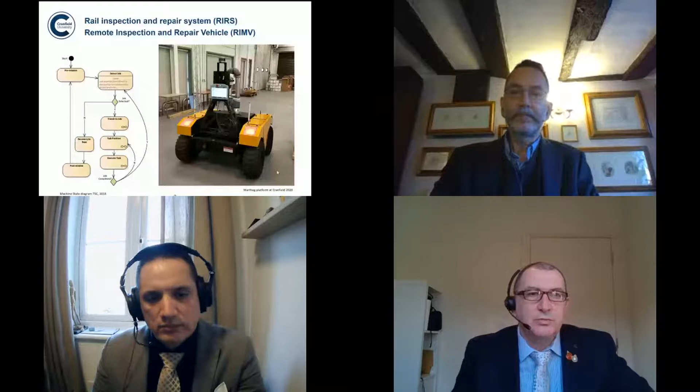Can you hear me? Yes. Good afternoon, everybody. So I'm Rob Anderson. I'm a principal engineer for Network Rail, and I lead the team that looks after specialist remote condition monitoring and the development of autonomous intelligent systems.

So first of all, why do we want to move towards the use of robotics in railway maintenance? Prior to the current restrictions on COVID from the pandemic, we had year-on-year demands from both freight and passenger services to increase the amount of traffic on the network. And because we have a limited network with no ability to expand, the only way to accommodate them is to cut down the time we have during the night for inspection and maintenance, thus allowing more time for the traffic to operate.

This is requiring us to revisit the way in which we undertake inspection and maintenance. For several years now, we've been moving towards a greater use of remote condition monitoring. This has been accelerated over the past couple of years and will continue during Control Period 6 through the Intelligent Infrastructure Programme. We are now moving towards the use of, or the aim to use, autonomous robotic vehicles to carry out this inspection and maintenance.

We've been doing this generally through our work with the Shift2Rail programme and our European partners, primarily through In2Smart and In2Smart2 projects, which we've been working on alongside Cranfield University to develop the autonomous command and control architecture.

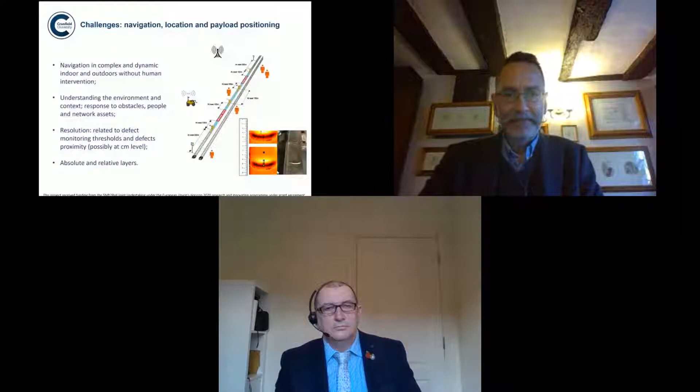Communications is a problem because in some places communication is great, in other cases it's very poor indeed. Then we need to deal with some of the challenges of the environment, the context that Rob was just describing.

Then there's real obstacles, some of which are intended to be there, like overhead electrification masts, and some which are perhaps less intentional but equal obstructions, and that might just be materials which have been deposited near the railway for later use—all of which have a genuine reason to be there, but make a challenge to autonomous vehicles.

Then we need to think about all the different information which applies here, and actually getting the vehicle to do its job when it gets there, which is about observation and measurement and action.

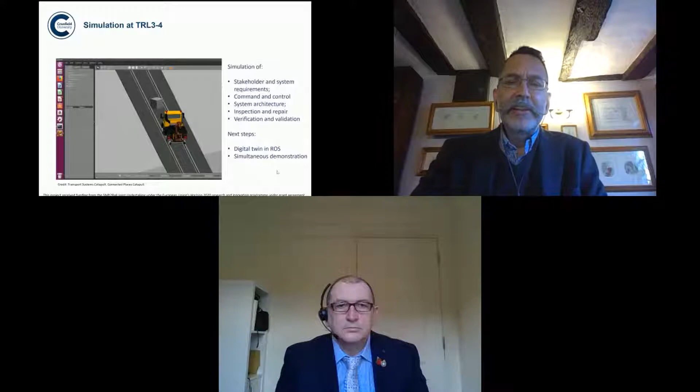We're particularly interested in making the simulation work with the real vehicle. Here you see an image from some of the earlier work done by the Transport Systems Catapult with a different type of vehicle. And really the vehicle itself is something which we are agnostic about.

The illustrated example in the screenshot here is a Unimog, Mercedes Unimog vehicle, which clearly is different from the Warthog vehicle. However, it's got a lot of the same stakeholder requirements, command and control issues, systems architecture, and the requirements for inspection, repair, and importantly, verification and validation of that system.

So next steps in simulation are to produce a digital twin type architecture in ROS. Those who were on the last session saw some implementations of that in other people's research, and a simultaneous approach where the vehicle can be observed and programmed and be seen to be doing what is in the program in real life as well.

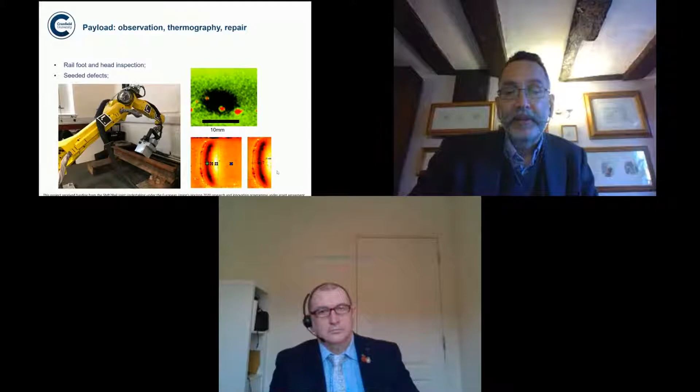Then we're interested in a variety of different payloads, that is involving inspection and repair. In the first instance, we'll use some simple visible light cameras. The Warthog vehicle already carries two as a matter of course, and there's additional sensing like LiDAR, for example, on board.

But from an experimental point of view, we've been using thermography in the infrared to detect rail foot defects, and we have also just started a piece of work to look at rail head defects and set up the Warthog with some ultrasonics measurement in order to make those observations.

In the image here you can see some of the thermography work that Isidro's led, and that has positioned an active thermal infrared camera to detect faults on the rail foot. The rail head has plenty of technologies which are quite mature for detecting faults out on the railway, but it remains a challenge to be able to see, for example, corrosion pitting on the rail foot.

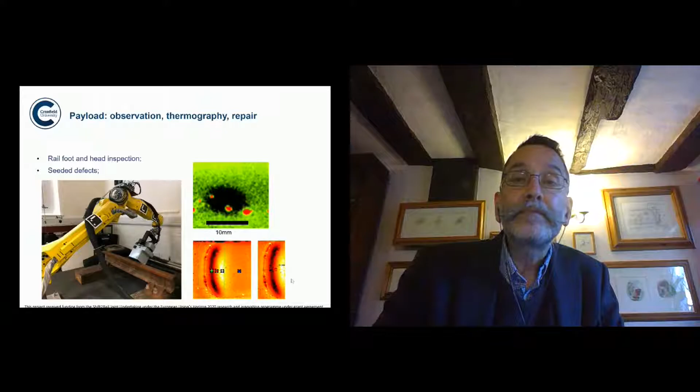So I mentioned that we're also doing a number of projects in track work, and within In2Track we did a project a couple of years ago in In2Track 1, and all of these either have started or are about to start in In2Track 2. So we're going to tell you a little bit about our work in switches and crossings, and we've also just started a piece of work on track geometry repair.

Track geometry is often dealt with wholesale on a large scale by large track tamping machines and lining machines, but there remains a particular interest in reducing the cost and improving the effectiveness of spot repairs of a few meters of geometry.

Then we're also looking at some rail defect monitoring with ultrasonics led by Isidro, and that leads into a parallel piece of work with ultrasonic testing on the Warthog vehicle, which has just started as well.

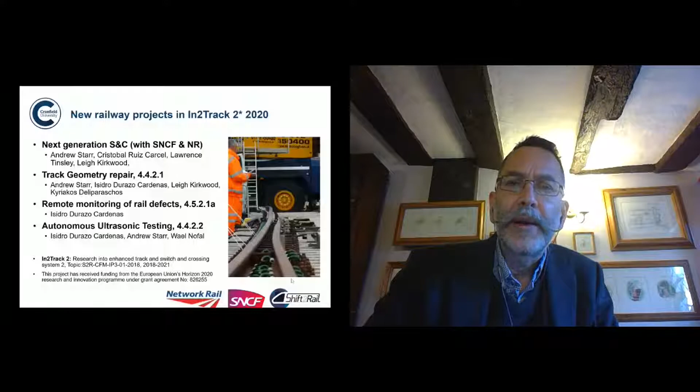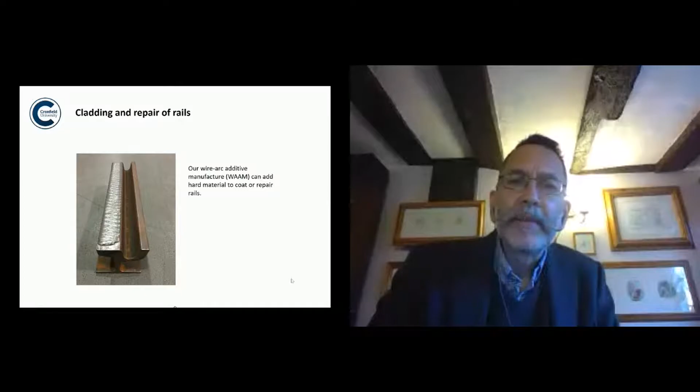Thank you, Andrew, and thank you, Rob, for the interesting introductory presentation. As Andrew mentioned, we move on to the presentations by the current researchers on current projects, and they will give you a flavor of what's going on at the moment at Cranfield, and an overview of the research and what would be potential challenges and opportunities for these different areas of research.

So the first, I'll try and share my screen with the order of presentations now. See if that works. Okay, I'm going to go to my... It looks like I'm not able to share my screen. Isidro, you may want to share the application. So if you go on to the share screen mode, you should have tabs. Select what you want and then click share. Yeah, but it's not there, Pawan. So anyway, let's move on. The order I will introduce the presenters anyway after they finish.

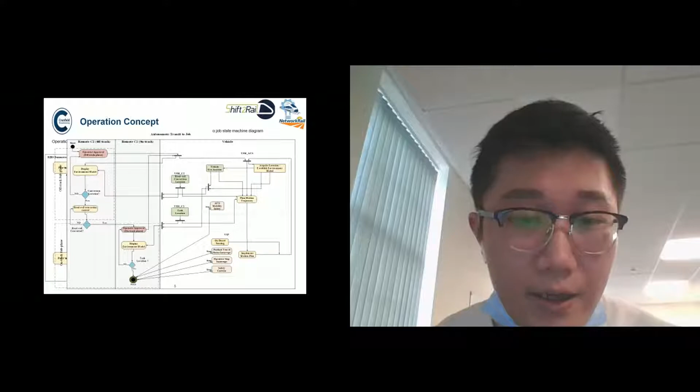For the project management, our team also established a TRL evaluation tool to help the manager and the collaborators have a full understanding of the progress and the completion of the project. This project is inherited from the previous one, so for this part, we will start from TRL 5 to TRL 7.

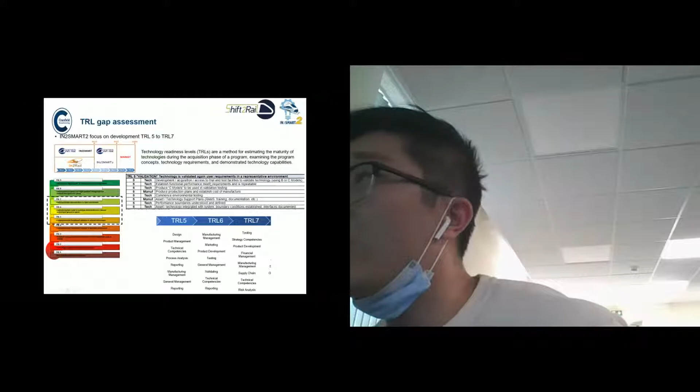This tool can help the management to examine the standard of the TRL and the progress we have in the database, by examining each standard criterion of the TRL with the progress or documents in the database. The manager will have a completion percentage of the whole project, and then

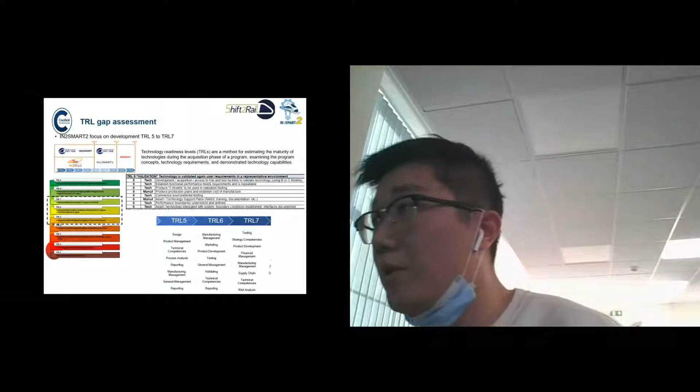if this TRL hasn't been achieved, the tool will also give out what kind of skills of the workers or the developers are needed, to help the manager get help from the people who have these kinds of skills.

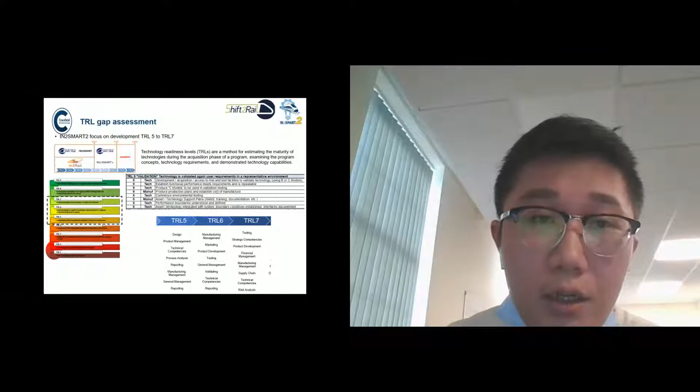To achieve the command and control of the RIRS demonstrator, we decompose the demands of the stakeholders and the recombination into several sub-work packages, which will help us to build and model a system architecture. For the command and control, we're gonna finish the human machine interface, work acquisition control, the geolocation and geomapping part, data management, the external system ad hoc interface, and integration layer.

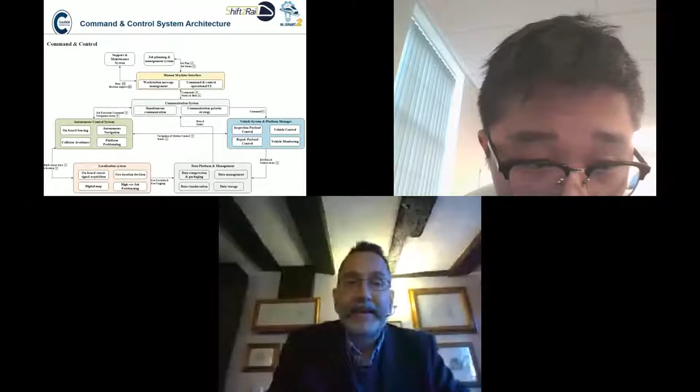How come you're muted? We've lost your sound, Hao Chan. Isidro, would it be better to move on to our next speaker? Because the... Yes, I think that will be a good choice. So the next presenter is Masoumeh Rahimi, and she will talk about her work on location. Good plan, thank you. To everyone.

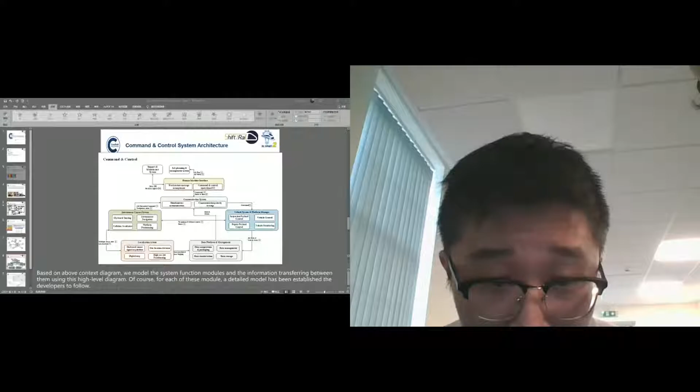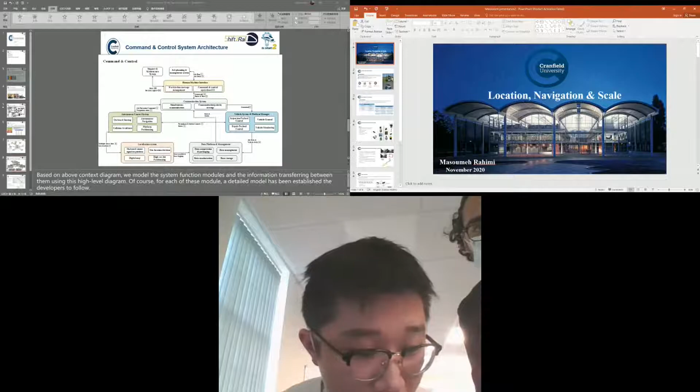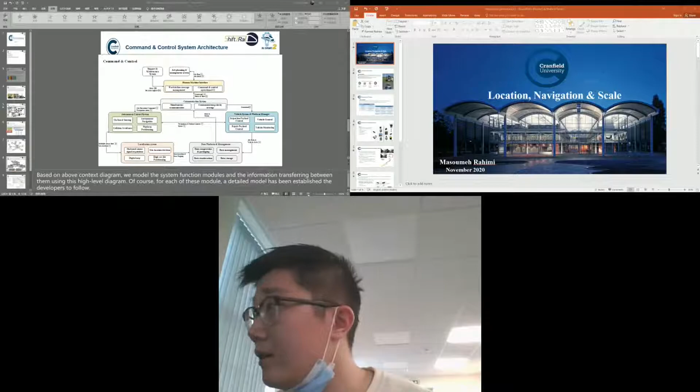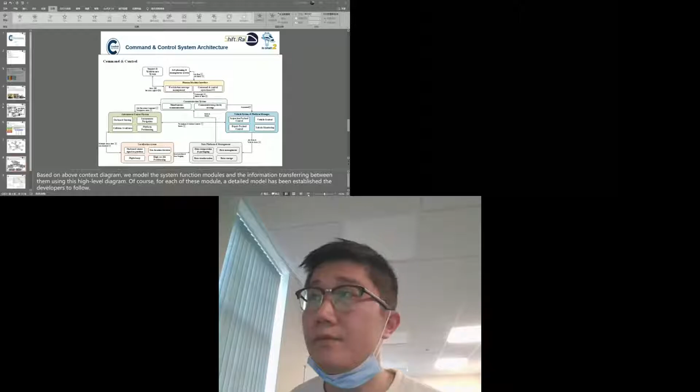Hello. Okay. How can we hear you now? I should stop sharing. We're just trying to get Masumi going. Hello. Can you hear me? We hear you. Do you hear me? Yes, it's clear. Okay. Sorry, I don't know what the problem is. You went on silent. You became muted. So if you'd like to wrap up, then we can move on to location navigation. Okay. May I start? Hao Chan can finish, and then Masumi will go on. Okay, I will finish mine. I have only one slide left. Yes. Thank you. Can you see my screen? Masumi, can you just wait till Hao Chan finishes? Sorry for the software problems.

Thank you very much. My part is finished. Thank you. Masumi, you can go on. Yes.

From where I can... I click on share screen, but my PowerPoint is not coming to application window. Can you hear me? We can hear you, yes. But you know, I click on share screen, I cannot see the PowerPoint in order to share with my audience. The first time I saw it, but now I cannot find it. Okay, is there anyone on the line that can help? Yeah, yesterday someone faced the same problem during the presentation, and then he refreshed the page with Control R, then it worked. Maybe Control R. No. Just see, I can share this one. I cannot see my PowerPoint. The only item that can on my laptop is this.

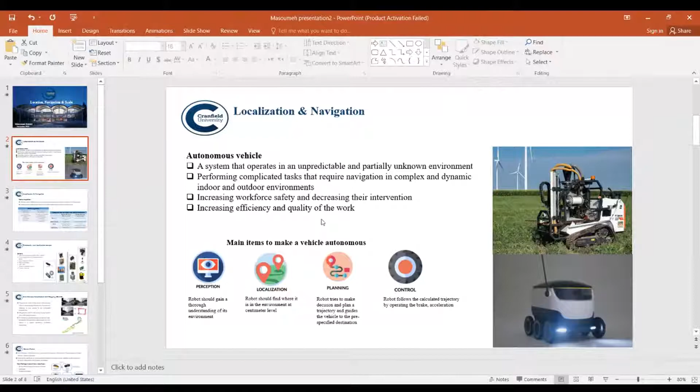Okay, so sorry. My presentation is about location, navigation, and scale. First of all, about autonomous vehicles. An autonomous vehicle is an agent which is capable of navigating intelligently anywhere, in various static and dynamic environments, and the applications of mobile robots are growing day by day in industry, agriculture, transportation, railway, as they are performing complicated tasks that require navigation in complex and dynamic indoor and outdoor environments. They have also offered a vast variety of positive points to their users, such as increasing workforce safety as well as decreasing their intervention, and also increasing efficiency and quality of the work.

But for having an autonomous vehicle, there are four main items that should be met: perception, localization, planning, and control. In perception, the vehicle utilizes a group of onboard sensors to detect, understand, and interpret the surrounding environment, including static and dynamic obstacles. In localization, the robot should find where it is in the environment. In planning, the vehicle uses the knowledge of the robot's position and obstacles around it to make a decision and plan a trajectory. And lastly, in control, based on the selected path, it extracts the necessary values regarding acceleration and brake for the vehicle.

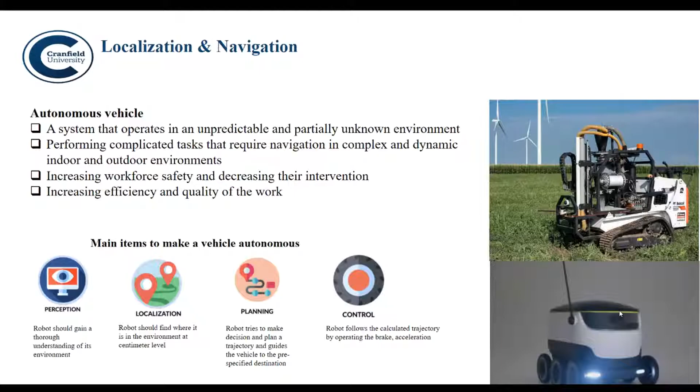Next, we have two main types of position acquisition, absolute and relative position measurement. The first refers to localization techniques that provide a direct measurement of a global position. The second refers to the process of determining position relative to a starting point. For these two methods, different kinds of sensors have been proposed. We have GPS, laser range finders, cameras, and beacons for absolute measurement, and inertial navigation systems and dead reckoning devices for relative position measurement. These two types of measurement have some differences in terms of reference requirements and errors.

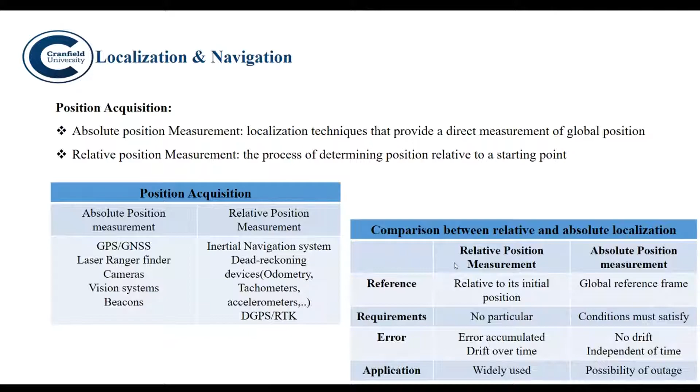Nowadays, three major types of sensors are applied to the SLAM technique: acoustic sensors, laser rangefinders, and visual sensors. But as I mentioned earlier, these sensors have their own positive and negative points. So in order to overcome the limitations of individual sensors and improve the efficiency of the overall autonomous vehicle system, sensor fusion methods have been proposed. The main challenge in sensor fusion is that these sensors provide different temporal and spatial resolutions, different data formats, and geometric alignment. Here I have also mentioned the impact of sensor fusion. For instance, for navigation, if you use GPS and INS without fusion, we have GPS outage in denied areas and drift in INS readings. But with fusion, we have continuous navigation and correction of INS readings.

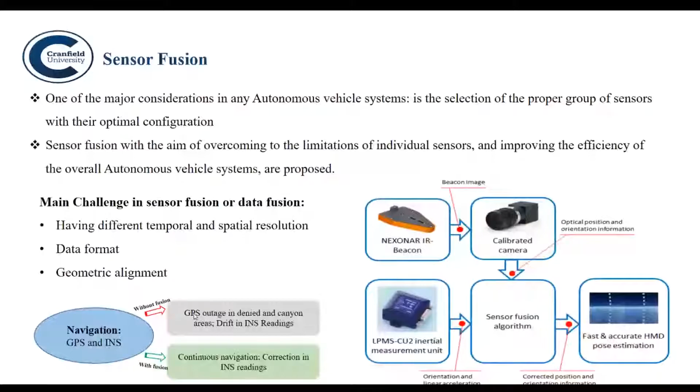First of all, we want navigation which we want to perform in complex and dynamic indoor and outdoor environments without human intervention. The second challenge is understanding the environment and context. We want this autonomous vehicle to be able to respond to obstacles, people, and network assets.

And the other challenge is resolution, that we expect to have a robot that can detect and monitor thresholds and defect proximity at least in centimeter levels. So this is the final presentation.

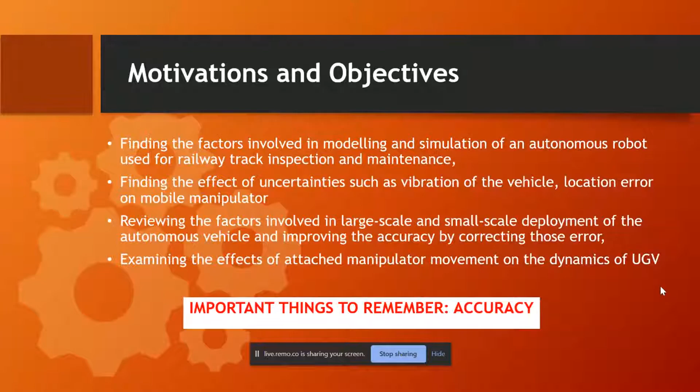So as we are going, we need a robot which can travel, and also we need an arm. So we chose the Warthog UGV from Clearpath Robotics and the UR10e arm from Universal Robots. So we get a mobile manipulator which can travel a distance and can perform some task or can carry a camera for the inspection work.

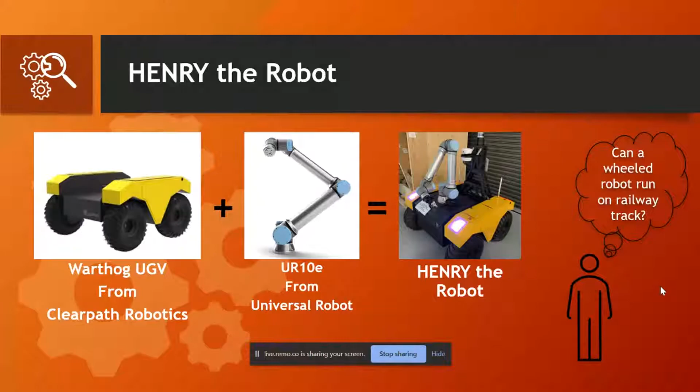So the question arises whether it can travel on the railway track or not. In a sense, it can travel, but it will not be efficient. So our solution can be using a trolley. It's a very simple mechanism which can carry the robot through the railway track. The robot will be in direct contact with the contact roller. Then the power will be transmitted through the belt drive into the 10-inch railway wheel. So it's a simple mechanism, but an effective one.

So before going to the simulation, it is important to learn about the joints and degrees of freedom. When there is the arm and UGV, there are a total of 12 joints, 6 from the vehicle and 6 from the manipulator. But when we add the trolley, there are more joints. And these additional joints actually create complexity in the simulation. So we find out whether these joints can be simplified.

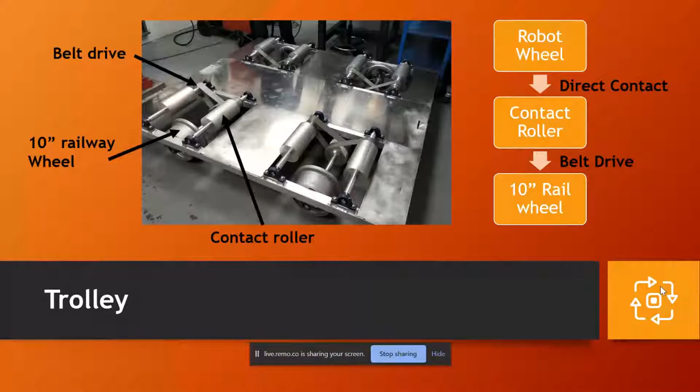And interestingly, there are some joints which actually do the same task. Because when the robot and the trolley are on the railway track, there will be no rotational movement. All 4 wheels of the robot will run at the same speed, and the vehicle will go forward or backward, which can be considered as a prismatic joint or translational movement.

So this simplified joints diagram will actually help us to remove some complexities from the simulation, which will actually be faster during the computation work. So we're in a very early stage of simulations. We're using Ubuntu 16.04 and using ROS Kinetic.

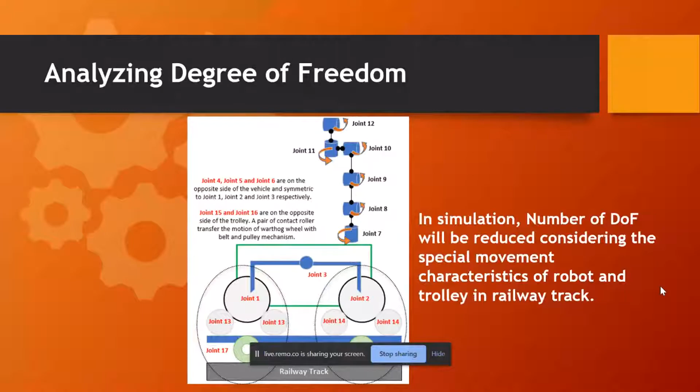Then we researched some visualization software, such as V-REP and Gazebo, and we came up with Gazebo because it will be integrated with ROS, as we'll be using ROS as our middleware. And for the arm manipulation, we will use MoveIt, and RViz will be used to visualize the robot and the sensors.

So we have started from the baby steps, as Professor Andrew Starr mentioned in the beginning. In the beginning, we will do the simulation in a lab environment. Then we will go for the track, for the trolley, and the whole simulations.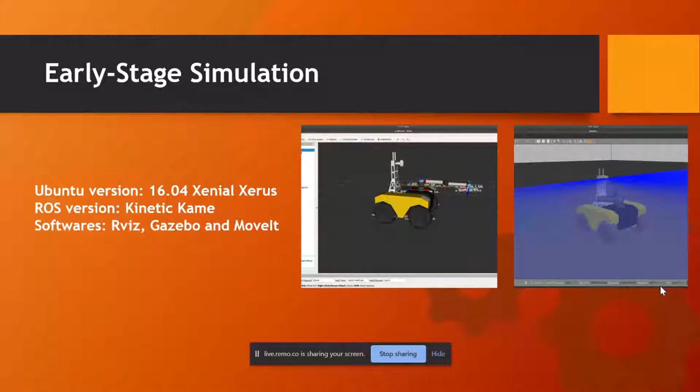Thank you, Miftah, for your presentation. Now we will move on from inspection topics to track topics. And the first presenter is Lawrence Tinsley. He will be talking about switches and crossings.

Hello, everyone. Can you hear me? Yes, we can hear you. I can hear you. Okay. Okay, can you see my screen?

Yes, we can. Okay. So my name is Lawrence Tinsley, and I'm working in the rail project with Shift2Rail, working with Andrew Starr and Cristobal Ruiz. Our objectives are to develop a design for the next generation of switches and crossings. Our aims here are to improve the reliability, maintainability, and reduce the overall whole life cycle cost.

And this is broken down into 3 key stages, which involve the literature review, where our aims are to identify the industrial requirements and the leading failure modes that affect switches and crossings. And from here, we are engaging with industrial partners to identify the existing technologies, the new concepts that are available for integration into a new system design, and new monitoring technologies that will be available for including in the new system.

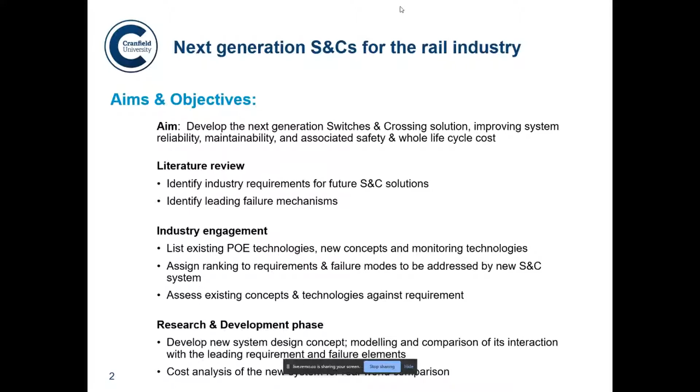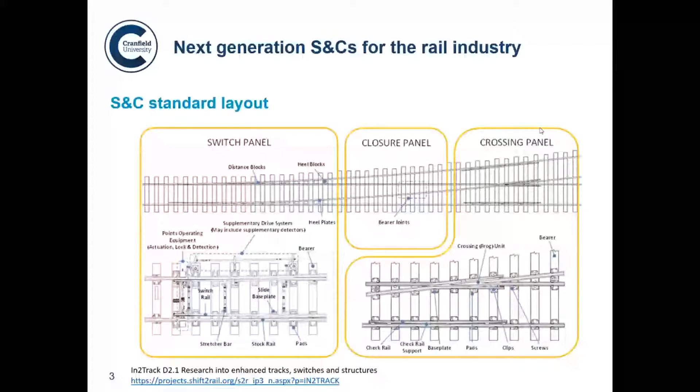So, for an example, here's a standard layout for an S&C, and there's quite a lot of information. Quite a lot of components to the S&C, and so in order to identify where we are looking to target, we're breaking it down into the various components. So all of the parts here that are highlighted are the various aspects that we're looking to target.

So you have the motor, you have the actuation system, the switch rails, and all of the locations in which we can add sensing and monitoring technology so that we can improve on the detection of the current state of the system and various parameters that are associated with failures.

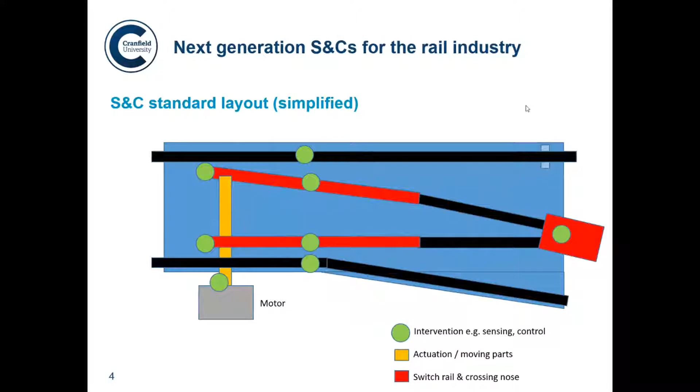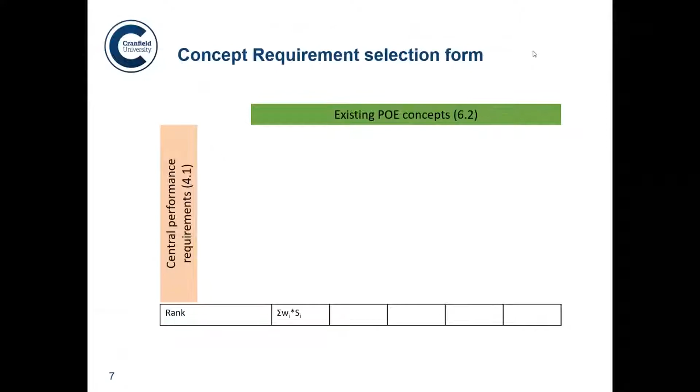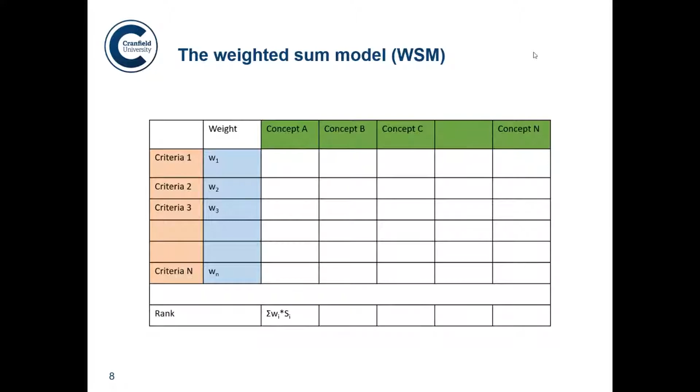So if these are our priorities for selecting the new system, we've broken that down into where in the S&C these requirements are actually applied, and this leads us to the design for the concept selection forms, where we apply the rankings and the criteria, and we're selecting against the various concepts. So this is going to result in us completing 6 assessment forms. We're looking at the existing POE equipment, new concepts, new technologies against both requirements and failure modes.

And so this is what the assessment process looks like. We have the requirements listed with the weighted ranks. And we're rating each of the requirements and their interactions with the different technologies based on a scale from 2 to -2, or 0 with no interaction, so that this allows us to prioritize the concepts that we are selecting.

So where we are in the project so far, we've identified the requirements and the failure modes, and we have rankings for these requirements, and we're in the process of applying the assessment so that we can identify the design parameters for the new system. And that's the end of my presentation.

Any questions? Thank you, Lawrence. We will move on. I think we will take questions at the end of the presentations. So the next presenter is Kyriakos, and he will talk about spot repair of ballast.

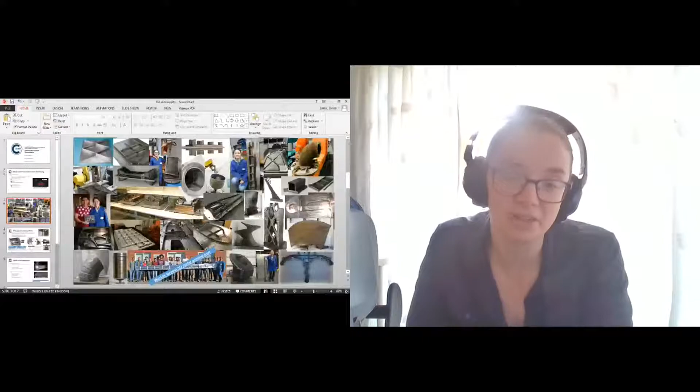So using this process, we can deposit many different parts. Here is a slide showing many of our parts that we deposited in Cranfield University, in different materials. We have aluminium parts, top corner left, steels on the top corner right, and all sorts of other materials. Titanium is shown widely here, but we also have copper and refractory metals.

So why use wire-based AM? What are the business drivers for this? The first one that is often highlighted is the cost saving and the material saving compared to a conventional manufacturing method. On the bottom left here, you can see a titanium landing gear rib that is normally made by machining a titanium block. For a part that weighs 20 kilograms at the end, you need 240 kilograms of titanium to machine it out of a solid block, but you only need about 50 kg of titanium using WAAM. Given the cost of titanium, that leads to a reduction of about 70% in terms of cost.

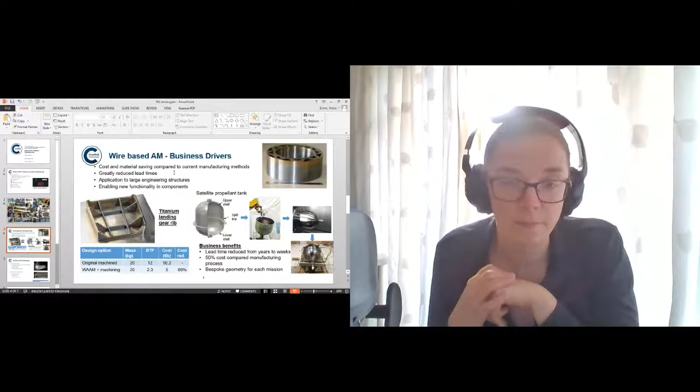The other great business driver is the lead time reduction. You can see an example of the satellite propellant tank here. For a component like this, for space application, the lead time using WAAM can be reduced from years to weeks, and that drops the manufacturing costs significantly as well.

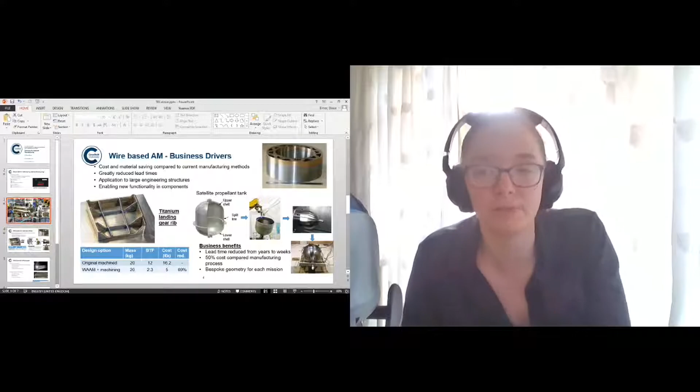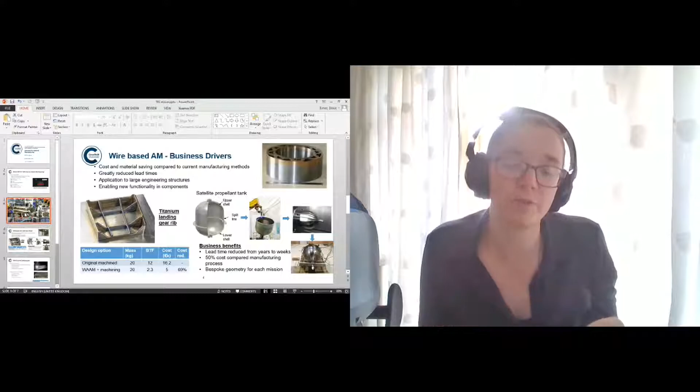So, for example, using very high grade steels where you need a high wear rate, but you don't have to manufacture the whole part in this very expensive material.

You can use strain hardening using machine peening, for instance. You can even do localized heat treatment using the heat source you use to deposit the material. And all of this can be done with a robot.